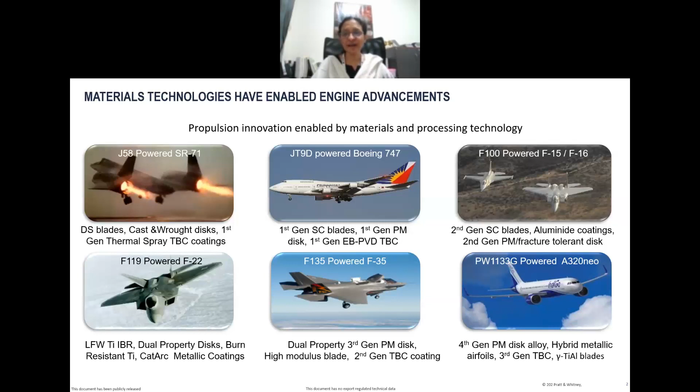But as we march towards all of that, what I would like to highlight in the next slide is really the chronology in terms of the timeline. Though the slide is busy, what I want to show you is typical product development in this high-end, structural engineering product, which has far-reaching design constraints compared to those used even in space, nuclear, automotive, or locomotive. Aero engines, both military and commercial, have far more design constraints, which means it is a constraint for all engineering disciplines - electrical, aero, computational fluid dynamics, propulsion, combustion, etc.

What I want to show you is this timeline: 1960s, then 70s, then 80s, then 90s, and now we are in the 2000s and beyond. The fact that to qualify one product takes about a decade, and to qualify one part, one manufacturing technology, one design - in each of these engines there are 60 to 70,000 parts - costs about $1 billion by either EASA or the Federal Aviation Administration. So in some ways we're very thankful because it keeps us all gainfully employed. If I work on one technology, after 45 years, after a PhD, I can retire with the same technology. So it keeps me motivated, working on it, while at the same time gainfully employed, as I say.

But then time has come now. We're all in such a fast pace - look at us, the kind of things happening, I don't need to iterate that to this eclectic audience. I think the important thing I want to show is how can we go into the dream of something like high-speed civilian transport? How can we go into accelerated product development for advanced technology? We're talking of spacecrafts, colonizing Mars, so many things.

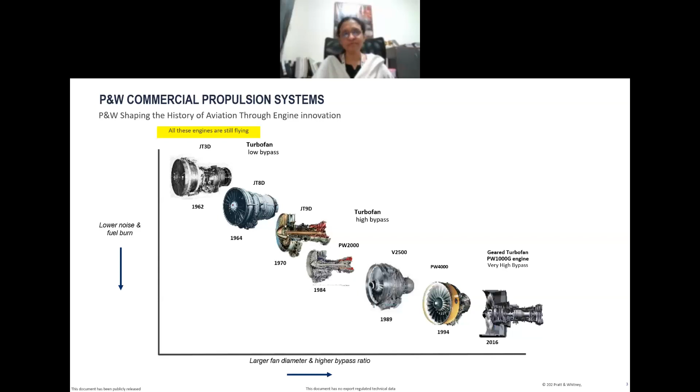And that is where I think additive manufacturing is really a powerful technique, especially considering that, as we spoke just before the meeting formally started, it is a little bit of a hype right now. I'm going to definitely talk of the advantages, the pros, more than the cons. But then every manufacturing technology, as you all know, has a form, fit, and function. So we can't chock-a-block replace one with the other. We have to take the good and the bad together and then use the right form, fit, and function for accelerated technology development. So if that is the case, what are we talking about?

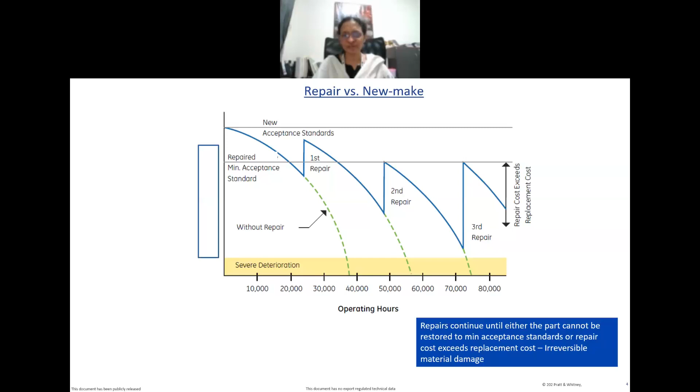Most of the work that I have done, at least what is published in the open domain literature, has been in the area of repair and refurbishment of very high-end hot section components.

I don't know if you can see it, in the back of my office, there are some cross sections on the walls out here of engines.

But just for the students who have joined in new, and for those of you who are absolutely new and would like to get into additive manufacturing, I would say the sky is the limit in terms of research opportunities. For us in the industry, we have to get translational research going, so we have a very hard timeline. That is where partnering with universities, having MTech students, has really been the name of the game. I will iterate it as I go along.

But just to start with, the reason why it is so attractive in the aerospace and space sector, even compared to all the others, it is all pervasive now, but even compared to all the others, is simply because hotter and lighter are the two common buzzwords we keep hearing reiterated time and again in aerospace and space. Not that it is not in the others - for example, in an industrial gas turbine, lighter is not such an important metric. Hotter is, in terms of power generation gas turbines, but cost is a big issue there.

Whereas in the aerospace and space sector, it is low volume relatively speaking. It's not like the die casting industry of the automotive, high pressure die casting or injection molding, where we're looking at 10,000, 20,000 parts per day. Here, we're not talking of that kind of volumes.

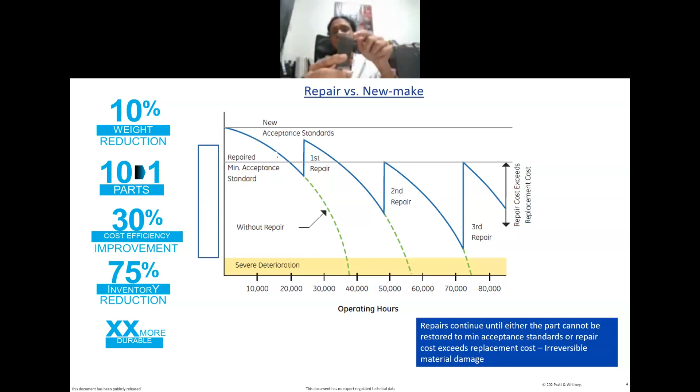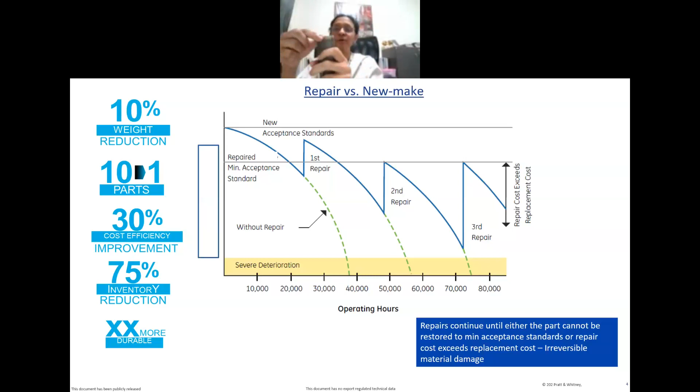I'm showing you a souvenir I took back from my previous job, and you can see this welded tip here. It's very difficult to weld a single crystal, as you all know, because welding is a melting and solidification technique, and you're going to end up with equiaxed grains. So do I just throw this away when it comes back after a year of service exposure?

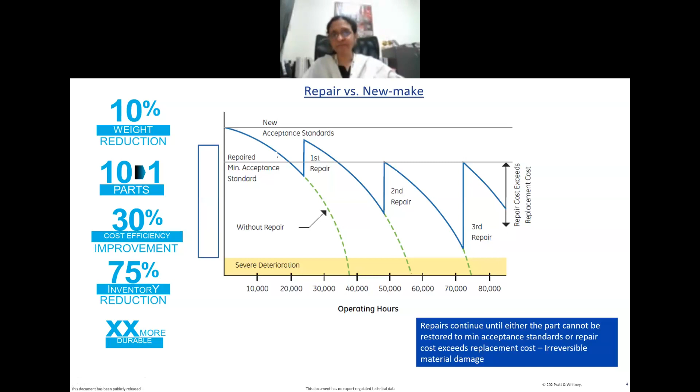It's so expensive, and you can't get it for love or money in a short span of time. That's why I'm showing you this second line. We're always interested in hot section component life extension. The criterion we use is that any refurbishing technology always feeds back into the new make as a lessons learned, giving designers the boundary conditions for finite element modeling iteratively for the next product version, or even a completely new product.

This is where I started, maybe 13, 14 years ago, in additive manufacturing, long before it became a buzzword. I started in 2008 using additive manufacturing as a unique manufacturing solution for gas turbine hot section components, and I'll show you a couple of examples.

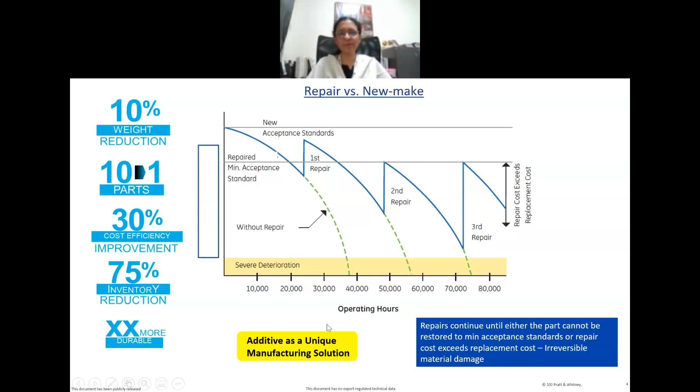Before that, let me share some Pratt & Whitney advances. Professor Sarkar was asking how prominent this is in India and in the world in aerospace, since aerospace and medical are both tied to human lives and require tough qualification and certification. This gives a quick bird's eye view—it's about 1.5 years old, but qualifying for aerospace still takes a long time.

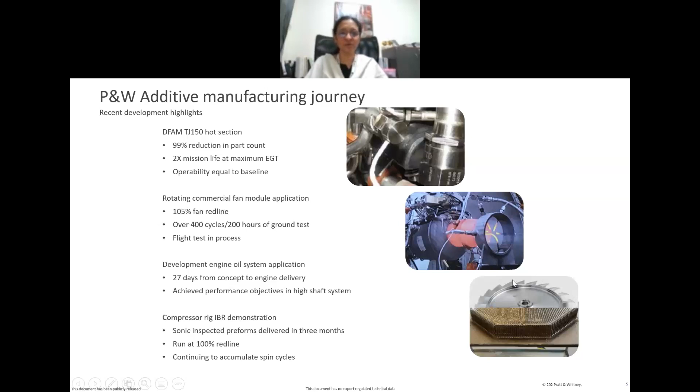We're also able to come up with new engine designs—lightweight, hollow blades, blades with discs, and so on. So this is some of the recent development at Pratt & Whitney.

Taken as a whole, we're now Raytheon Technologies, which includes the engine side, Pratt & Whitney, and everything else in an aircraft other than the engine, called Collins Aerospace. More recently, in the last 1.5 years, Raytheon's world defense and land-based divisions have also joined. More than 3,000 parts have been qualified for various applications—rotating parts, stationary parts, rig parts—and actually going into the engine, just to show the kind of progress in this industry.

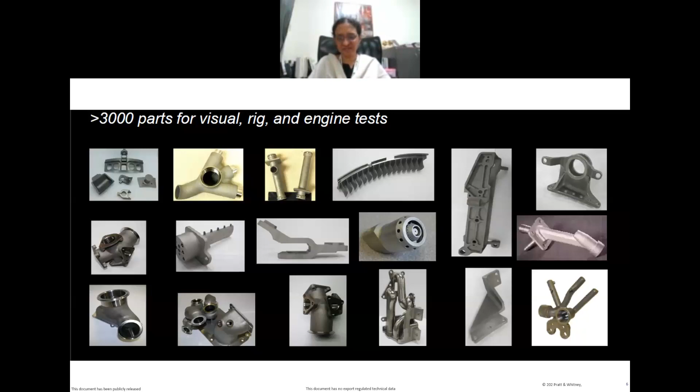Now coming to some case studies I'll share with you—most of the work I'm citing is from a review article I wrote about a year ago on the challenges in qualifying additive manufacturing for gas turbine parts.

If you look at the market for metal additive manufacturing, the mind automatically goes to laser powder bed fusion, since the footprint is about 300 or 400 millimeters by 400 millimeters. Larger machines exist, but the more popular ones are 400 by 400.

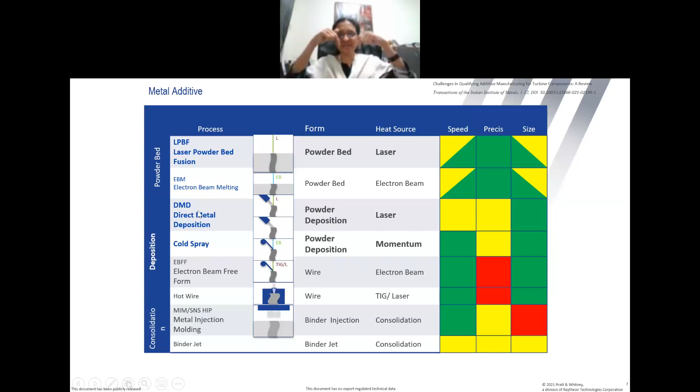And then next in line comes direct metal deposition, which is a laser directed energy deposition using a coaxial laser. And then there are many others, and ASTM is still deciding whether to categorize cold spray as a metal additive manufacturing process, because the definition of metal additive manufacturing, or even additive manufacturing, is to take inputs, take a CAD model, slice the model into several layers the thickness of a strand of hair, and then give it to the machine as G code.

So it has to get computer inputs from computer design. Now, so cladding, for example, even if it is a layer by layer process, and many other things like metal injection molding, are still not coming into the strict realm of the definition of additive manufacturing.

So this rough chart, this traffic light signal, is just to give you an indicator in terms of part precision, footprint, and high throughput to start with, either by research or in any aspect when we start to develop or work on aspects of additive manufacturing. It's good to have a rough idea on the form, fit, and function of where to start, so that research or product development is more meaningful. Of course, there are a lot of review articles on this, so I won't spend much time on it.

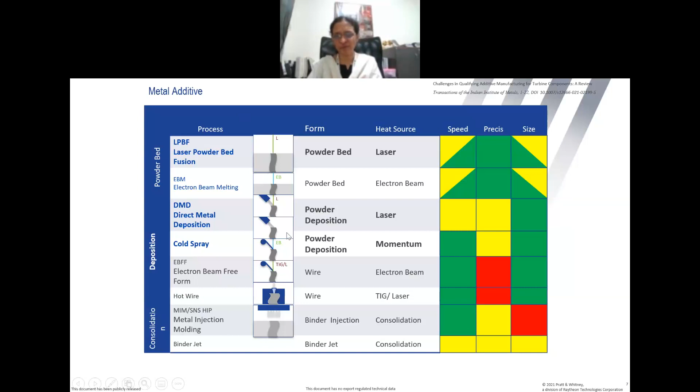But I'll go on to tell you the areas where I have done a lot of work myself, which are laser powder bed fusion, direct metal deposition, and cold spray coatings, which is not really additive, but it's a cousin of thermal spray coating.

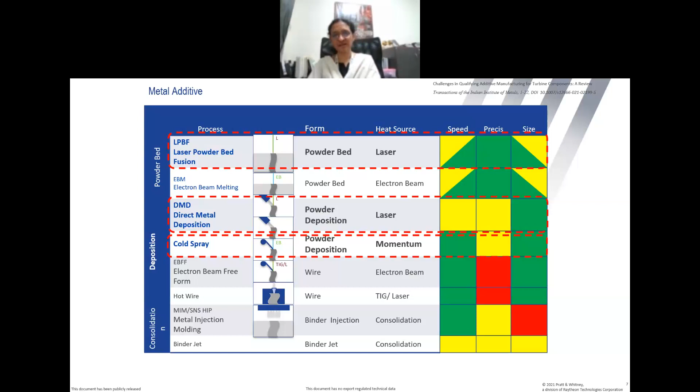So these, we have qualified a lot of parts, both for the oil and gas industry as well as the aerospace industry, in between briefly for the medical healthcare population in orthopedic joints, and also in the automotive and tool and die industry. So that's really where I go into the next slide, to show you the alloys I personally worked on.

That is the middle where I'm showing the pointer. These are some of the aerospace and other qualified parts, automotive cast, conformal cooling tool and die.

And some of the new alloys that we are working with in the last couple of years at the Pratt & Whitney R&D Center, again partnering with a number of universities, are listed out here. I'll come to that towards the end of the slide.

What I'm going to share with you in the next 10 slides is really how we started from the conceptual level. Conceptual level means not really at TRL 0 where we have developed a new alloy—no, we have used some commercially available powders or wires, but taken it starting from coupon level. That's what I mean: making coupons, making test pieces, and then establishing the feasibility.

By feasibility, I don't just mean bulk coupons, but actually doing the prototype with the section thicknesses, taking it to a TRL level 4, technology readiness level 4. That means we are presenting it as a possible outcome by testing all the mechanical properties, microstructure, reproducibility, repeatability, etc.

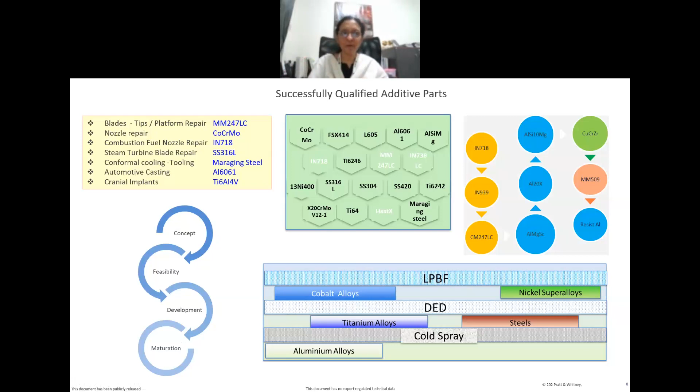So I'll just take you through this with some examples. And mostly what I'm going to highlight is really the successful qualification. Nothing comes without challenge, as all of you know, especially in a high-end technology for very, very high temperature applications. So I will particularly showcase how we overcame some of these challenges.

And just to impress upon you all, yes, challenges are there in any technology, any product, any qualification, and how we can do it in an accelerated manner through collaboration. I think that's what I want to bring: industry, academia, and research lab collaboration in the right way, at the same time protecting the IP, while ensuring students can publish, faculty members can publish—everything can be done if we set our minds together.

I will really emphasize this in the context of this particular centenary lecture series. So this is an example. All these are some of the published work. As I said, the only reason we are able to publish is because of the collaboration with the universities.

So this is the starting example. This is a power nozzle from an industrial gas turbine. It's made of a very complex cobalt-based superalloy called FSX414, a cobalt tungsten alloy. After exposure in the engine, you can see very complex cooling channels. There are radial cooling holes out here that you can see on top of this coupon. There are divergent, very, very complex designs.

And this comes back like a moth-eaten leaf after engine exposure. Some of you might have heard me talk about this, but really this is the first product that we qualified from India, got everything done from India. It is running all over the world now since 2017. So it's really very close to my heart. Also, because we were able to publish a lot, I'm able to show this case study.

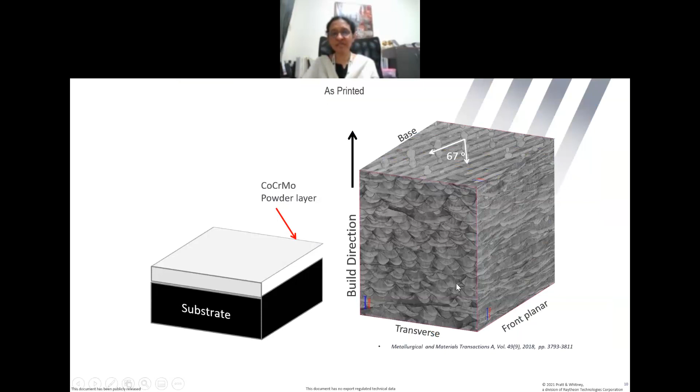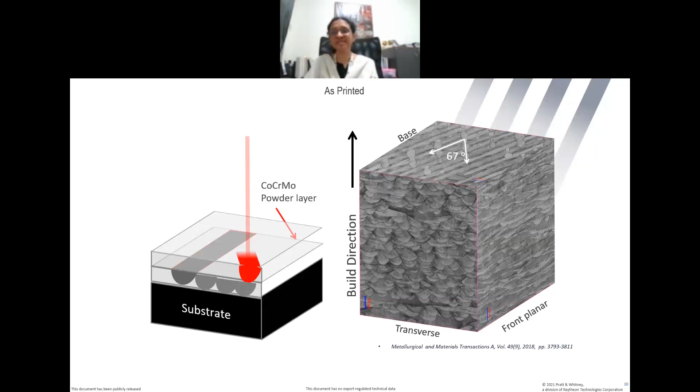So I'll start with both these case studies. One of the things I'd like to point out here is to start with not only knowing which additive manufacturing technique to use, but also ensuring isotropy of properties if it is needed. Sometimes you don't need isotropy of properties. Sometimes you need directionally solidified structures for better strain tolerance, especially in an aero engine.

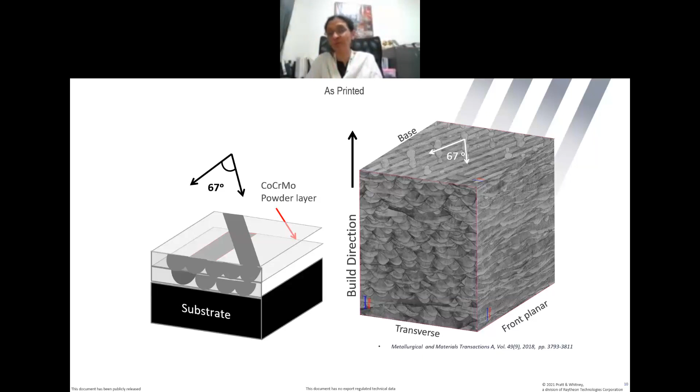The blade that I showed you a little while ago, you need a strain tolerance, very good strain tolerance along one direction, and you need isotropic behavior in the other orientation, the transverse orientation. How is it possible? How do you manufacture such things with conventional manufacturing?

So this cartoon that we just displayed is a layer by layer structure. This is a substrate on which you build it, and you can see the layer thickness, not marked here, but if you look at the micron marker in the etched three-dimensional metallurgical microstructure, it shows you that there is isotropy both along the build direction and transverse to the build direction, which was really needed in this particular application in the power nozzle, as I showed you.

And what you can see here in this optical microscope, which was taken by one of the students who worked at that time, is very, very fine-grained weld bead structures. Sometimes you can see it, sometimes you can't. Not all alloys will display this weld bead structure when you etch the microstructure. But what is really important is a very fine dendritic structure that you see.

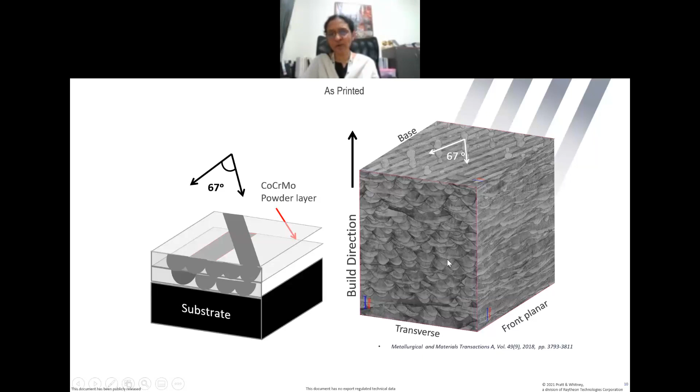So I won't go into the details of this, but I'm going to summarize 4 or 5 challenges upfront that you should look out for in every metal additive manufacturing technique that you're planning to use. Even if you're doing modeling, a lot of people are doing integrated computational materials, but I think right now experimental validation of those is not completely robust. So you need to do both alongside to accelerate this whole development process.

I'm trying to show you something quite different. Despite doing a design of experiments, the challenge we are facing is the lack of sensitivity in terms of the design of experiments telling you which energy density you can choose from.

For example, we get at least 5 or 6 energy densities - laser power, scan speed, layer thickness, etc. - giving the same dense microstructure, at least at the optical level.

Which means going forward in terms of making the part to the section thicknesses that is needed, or variable section thicknesses in terms of mimicking, let's say, this aero engine blade.

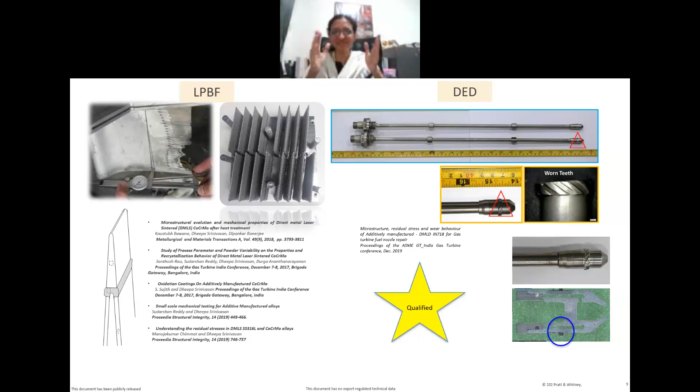So we have the extremes right in the first case study that I'm showing you, captured in terms of a hybrid manufacturing technology, using the true potential of additive manufacturing, as I told you, in repair applications.

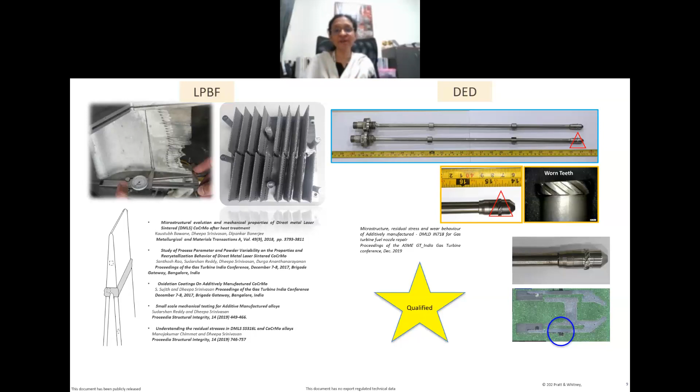So when I'm coming to that, naturally any welding or joining technique needs to have stress relieving. In any case, with additive manufacturing you need to stress relieve, because as you saw in the previous cartoon, it's a layer by layer process of melting and solidification.

Now, if you remember, conventionally - until 10 years ago, 15 years ago, even today - when we do one weld joint, ASME has several sections. ASME Section 9 has so many protocols in terms of what all to do.

Because any weld joint is going to have a tensile stress across the boundary, typically because of the nature of melting near the boundary and shrinkage after that. So we need to do a stress relieving.

So what I'm trying to point out in the second challenge here is it can be a boon and a bane, but it needs to be watched out for. That means we can use rapid solidification of additive manufacturing - it's actually a panacea for all the people in metallurgy there.

I'm very happy here because this is one particular technology where metallurgists will be employed in full swing. Not even so much mechanical engineers or others, but you do need high-end metallurgical, very strong skills in metallurgy because it's rapid solidification, welding and joining, you get metastable phases. It's the whole thing that really needs expert metallurgical knowledge out here.

So what I'm showing in the second challenge is when we heat treated it, we got a complete recrystallized microstructure. And what we also did in the heat treatment optimization, if you can see this thin line out here, you have the potential to optimize the heat treatment to tailor the mechanical properties to have an advantage or a disadvantage here. So that's what we did.

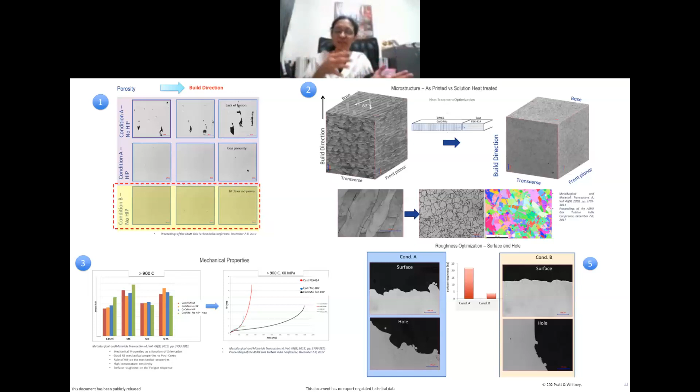So what we did very cleverly in this particular example, and it can't be generic across all designs, all products, all cooling hole dimensions, is we quickly changed the additive manufacturing diameter of the hole slightly larger in that particular customer product, and we calculated the pressure drop across that particular diameter. The beauty of additive manufacturing is overnight you can change the design and 3D print it without having to go to a casting, a pattern, get the pattern qualified, and then make a part. That's why this is so beautiful and so fast.

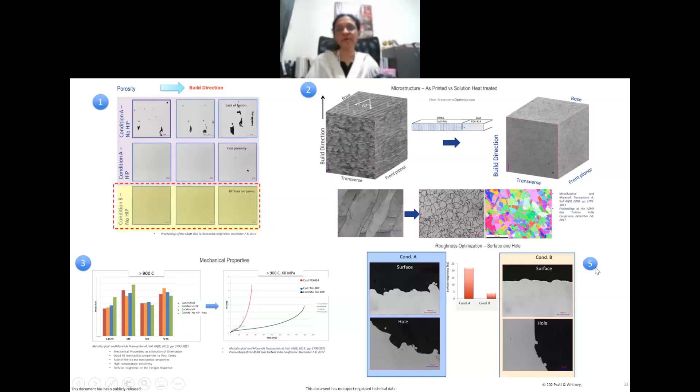So that's what we did, but definitely it's a challenge to watch out for, especially if you're working on actual product development. Now, the other important aspect I wanted to show you, despite all the hype and all the publications that have come out from various universities, I want to show you a very interesting thing we did earlier this year with Inconel 718.

During the COVID years alone, 2020, 2021, we looked at a review article that came out in early 2022. Inconel 718 is a workhorse alloy in the cast and wrought form. It's been used in aero engines up to temperatures of 650 degrees for at least the last 50 to 60 years. It is one of the most well-studied alloys, along with 625, in the additive manufacturing community, by electron beam melting, laser powder bed fusion, direct energy deposition, wire arc additive manufacturing, everything put together over the last 10, 12 years.

But can you guess how many peer-reviewed publications came out just in the last 2 years? Obviously because people were locked in and couldn't do much else, there were about 240 publications in good peer-reviewed journals. But yet, the number of qualified rotating parts in the aerospace industry, if you count, hardly 1 or 2. And why is that? They were at very low temperature or ambient temperature applications, because despite all this hype and all these qualifications, what holds for one temperature may not hold good for the higher temperature.

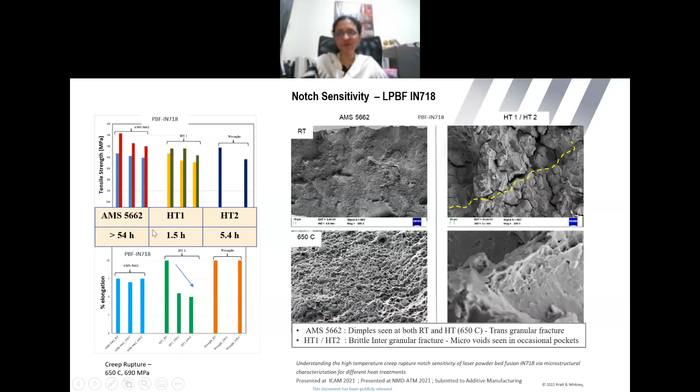I won't go into the details, but I wanted to show the students what kind of things you can help us with, since most universities, especially a university like yours and IITs and NITs, are equipped with very high-end advanced characterization techniques. So we used atom probe tomography to decipher the root cause, and we were able to propose a heat treatment to Pratt & Whitney achieving much superior notch sensitivity, on par with the wrought alloy.

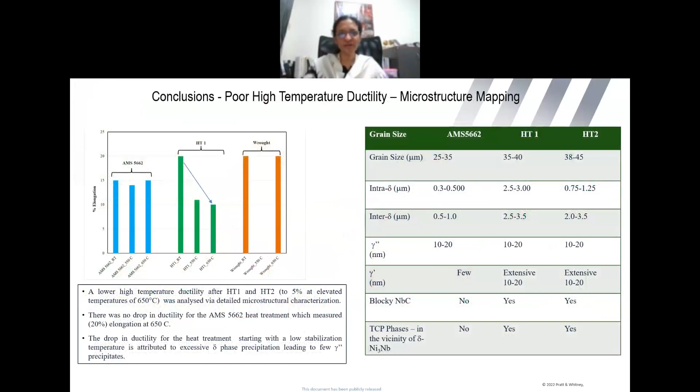So additive still has those challenges, that's what I wanted to show. I will move on and skip this slide since I've already shown you the conclusions, and come to the 7th challenge. Remember, we finished up with surface roughness. What is a big challenge facing additive manufacturing?

Taking the same case study which we qualified on the additive. This is a cast alloy, this is an additive alloy, this is cobalt tungsten FSX 414, this is cobalt chrome moly, dissimilar materials joining.

One of the big challenges we are looking at with researchers is how do we quantify small scale mechanical testing? Typically we test bulk materials, this is the ASTM standard specimen, ASTM E8 or whatever. The big challenge in additive is we are making a near net shape part, so I can maybe get a small 2 millimeter mechanical test specimen without damaging the part, take it out. But for 2 millimeter or 1 millimeter, we don't have any acceptable test standards, isn't it?

So what we did even 6-7 years ago in this case study is to weld this joint, by manual TIG welding. We took specimens less than 20 millimeters across this weld joint, because this was about 3 inch by 4 inch, and I was able to even extract this thin specimen. The thickness of the specimen is less than 0.5 millimeters, 500 micrometers.

That means I need to establish the microstructure and validate it with a standard ASTM bulk specimen, almost 2 inches long, this threaded specimen, and take a mechanical testing specimen across this tie line, and prove in this particular case that there was no debit to the mechanical strength across the welded joint.

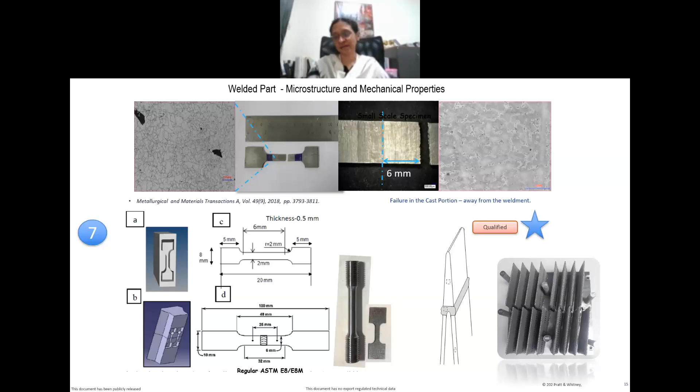This is definitely where the world is going. ASTM is also looking for proposals to fund research projects in terms of high throughput, small scale mechanical testing, both for creep, for uniaxial, high temperature, etc.

And this is a recent collaboration with IISc that I wanted to share with you. My collaborators are Professor Vikram Jayaram and Kumar at the metallurgy department, and we had a postdoc working on it. So what we are doing is creep testing. They have been working on it in this Pratt & Whitney funded project for the last 4 years, and we have successfully developed creep bending, not uniaxial tensile testing, and this entire beam cantilever is not more than 2 millimeters.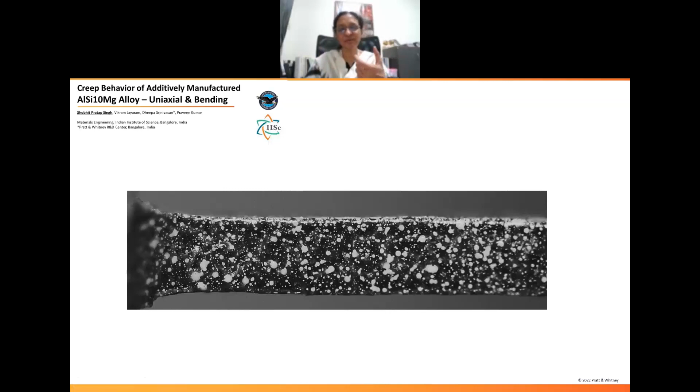A few millimeters long and 2 millimeters wide specimen. So we use digital image correlation in this example. You can see that with this bending, we are able to get on the right-hand side multiple creep curves using one particular beam.

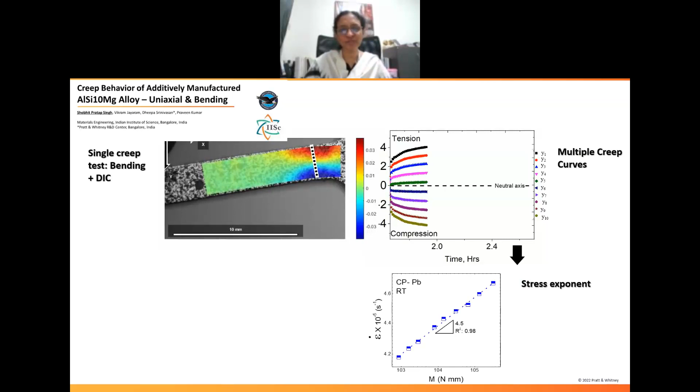I won't have time to go through this, but will definitely share some of the published work. I'm sure they will be happy to share several, at least 20 papers they have published in leading journals on establishing this with commercial pure lead, commercial pure aluminum, and now in the last 4-5 years working on engineering alloys directly for gas turbine applications.

Earlier for creep we used the Larson Miller parameter, Monkman Grant, with large specimens. You need many creep frames, one stress, one temperature, for reproducibility and repeatability. Here with one bending cantilever beam so small in dimension, 2 millimeters, you can even go down to microns, 500 microns. We are able to get across this cross section multiple creep curves. That is what I'm showing you here.

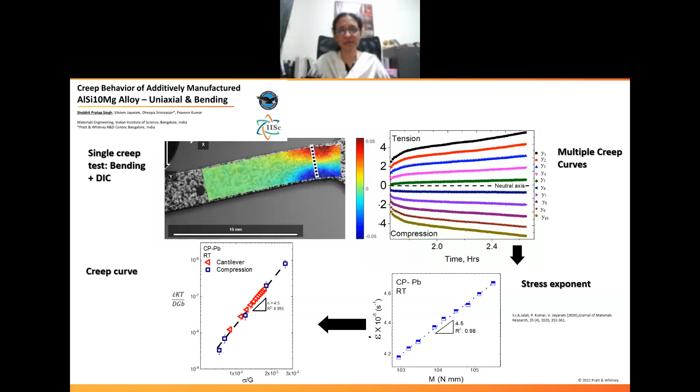As a function of bending moment, you can generate the entire stress exponent, etc., and find the mechanism of creep, and use this both as a quality control tool in the build plate, location specific, as well as a function of section thickness at various temperatures. We are working on this and recently published a couple of papers on this.

This particular example I'm sharing shows how we are able to delineate between transverse versus longitudinal build orientation. Remember, I told you that is a big challenge in additive manufacturing because of residual stresses, because of the nature in which it's printing layer by layer.

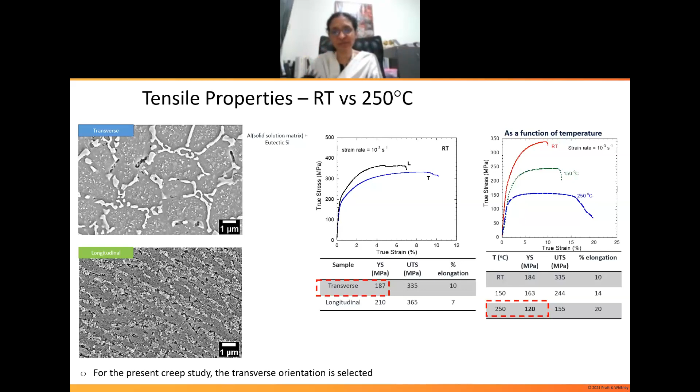This is a particular paper that we shared in ICAM 3D, showing how high throughput bending can distinguish between microstructural differences in a very quick manner using one bending creep specimen. And of course that's what I'm sharing with you here, the creep analysis - high throughput data acquisition from a single creep test.

You can see the load. They have facilities up to about 800 degrees C now in this bending creep. And you can see on the right hand side, digital image correlation coupled with additive manufacturing is a very, very powerful tool for mechanical testing.

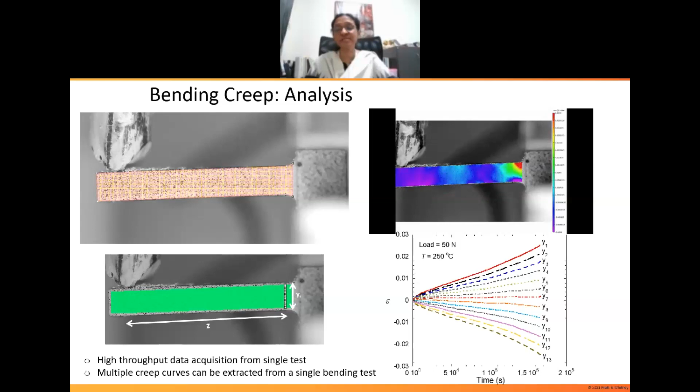I won't go into the details, but the beauty of this technique is you get tension compression data from a single bending creep specimen. No need to do separate compression tests and tensile tests. So for materials with tension compression asymmetry also, we're able to decipher this.

I believe I'm close to the end of my talk, but can I take another 5 minutes? It'll be 7:30. Can I take another 5 minutes?

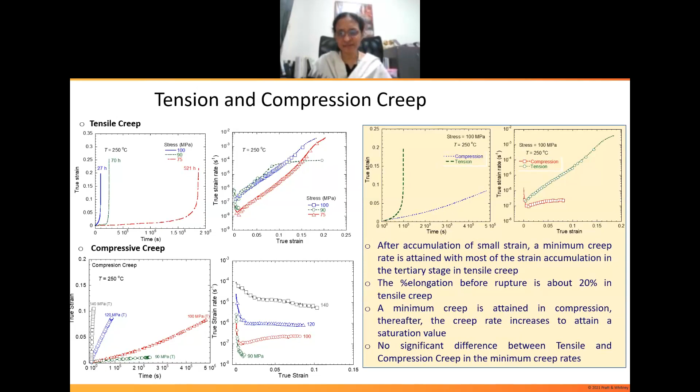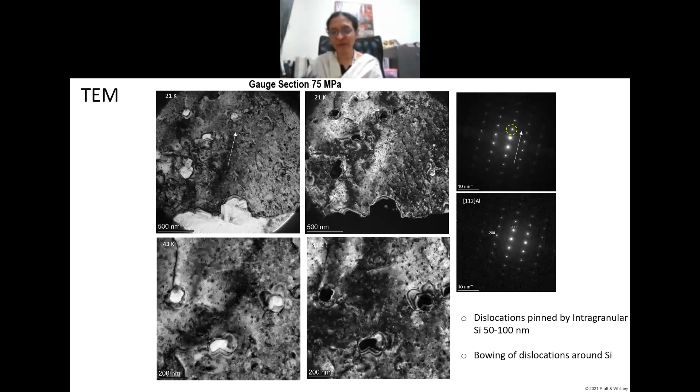Yeah, sure. Okay, so we did some very strong collaboration with academia. We were able to work out some of the mechanisms responsible for creep in this. And then I'll come to the last couple of slides here.

I want to leave you with 10 challenges. There are many challenges, but I'll stop with 10. What is the 8th challenge?

The 8th challenge is in how do we optimize bulk properties, which is what we evaluate routinely, especially as part of a master's thesis or a PhD thesis, even when we are doing design for additive manufacturing.

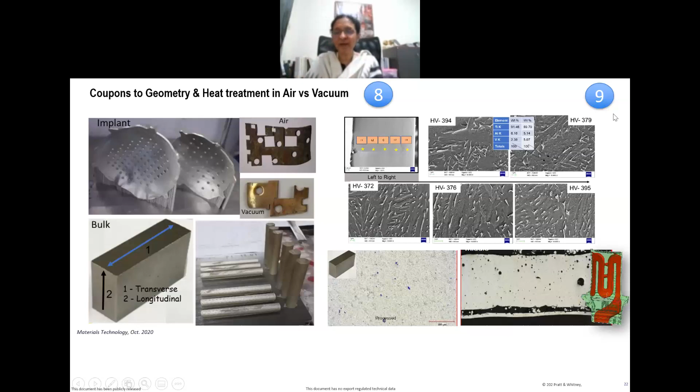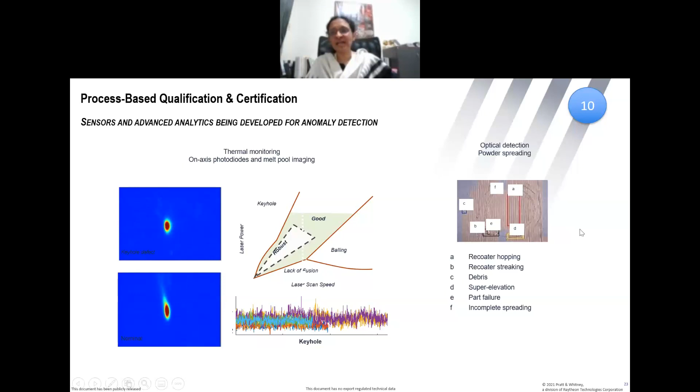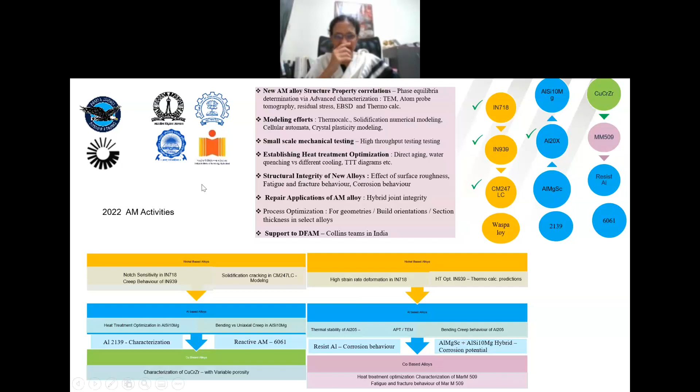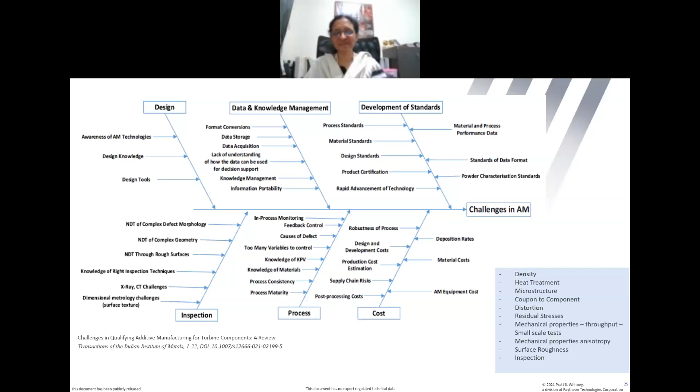This is some of the ongoing work in new alloy development together with lots of universities. I've barely shown you, but I have shown you challenges that came from successful qualifications of aero engine parts and gas turbine components. Far more challenges exist - these challenges only give us a learning opportunity. Despite all these application-specific challenges, we were able to overcome them. I just highlighted the 10 main challenges to say, as we hit a roadblock, we found a way to overcome these and were able to successfully qualify and put these into use - many thousands of parts have been made right from India, right from Bangalore, in additive manufacturing. We are able to take it forward from our country. So once again, thanks for this opportunity.